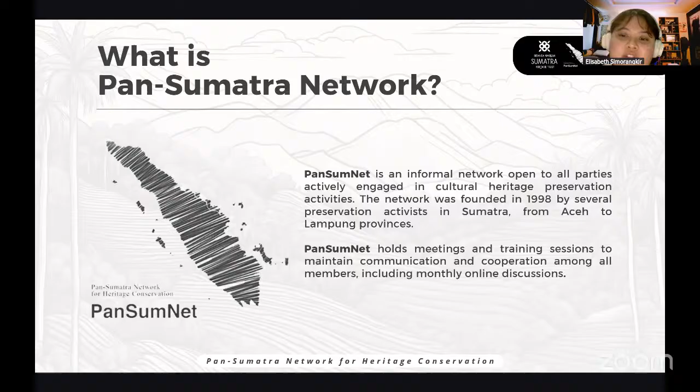and beyond. One of Pansumnet's regular activities is the Pansumnet monthly discussions, which has been held online since 2020. This program allows us to maintain communications, exchange knowledge, and build stronger connections among heritage practitioners, academics, professionals, and also communities.

Tonight's webinar is organized by Pan Sumatra Network for Heritage Conservation, the Sumatra Heritage Trust or Beranda Warisan Sumatra, and the Pusat Dokumentasi and Arsitektur or PDA. It is designed for heritage professionals, architects, and academics, and everyone who is passionate about preserving historical buildings and our cultural legacy.

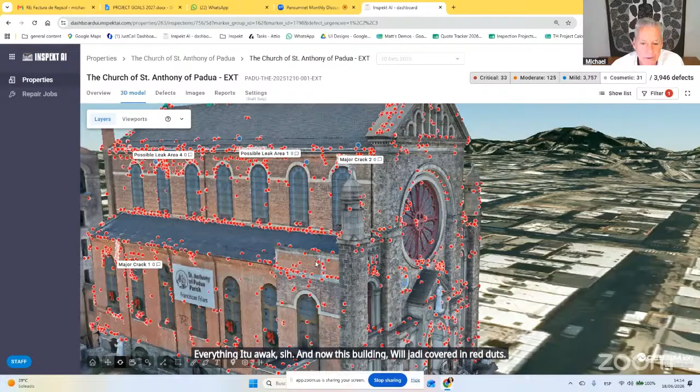But what we have is we've created this digital twin where you can see all the details on the building, and then we can turn off filters and look for critical, moderate, and mild defects. Now this building will be covered in red dots, and each dot is a defect located on the building. They tend to be cracks, mortar joints where the mortar has come out, broken glass, or something similar.

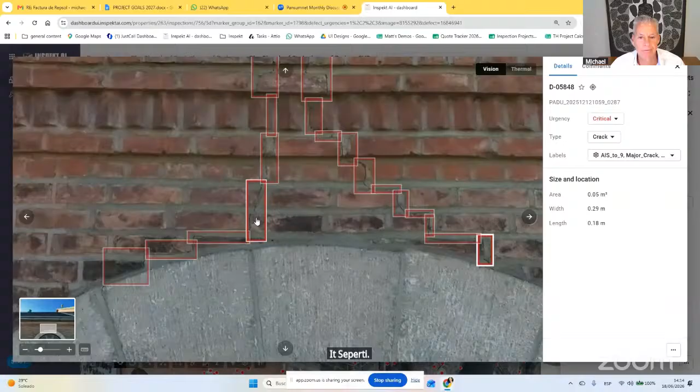So this building has many, many defects. If we go up here, we've got a major crack in this corner, running up this wall and coming back down the other side. This has actually snapped the wall in half, separating it from the roof, and this arch is settling. So everything is a little bit out of alignment, although you wouldn't see this from the street. This is quite a significant issue in this case.

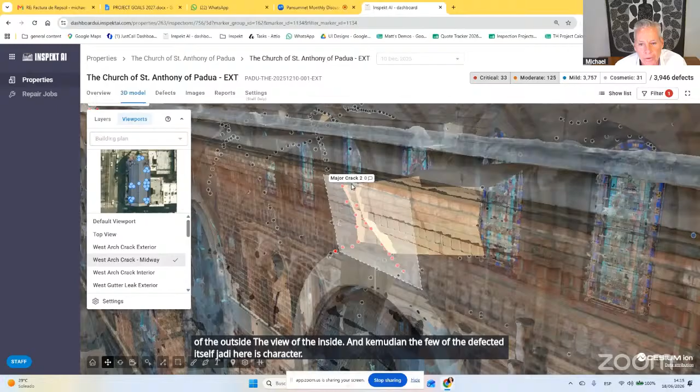And what we're able to do is look at the same view in X-ray vision. So you have the view of the outside, the view of the inside, and the view of the defect itself. Here's this crack going up the wall — in yellow, you have the crack as it moves through the wall, and here is the inside of that crack as it reaches the interior wall. We're able to take that data, find the same crack, and zoom back out to see all the damage caused by that specific flaw.

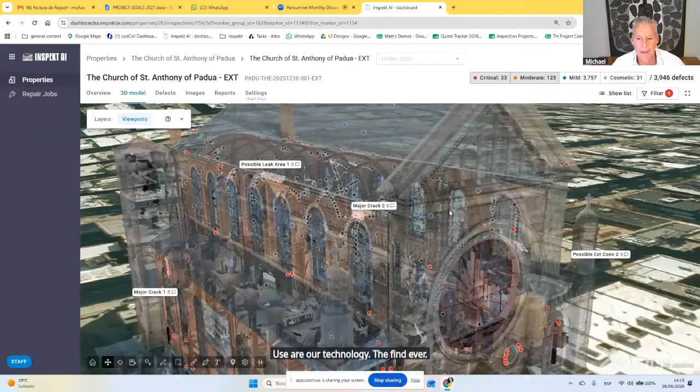Again, this isn't about the building type — you can do this on new buildings, old buildings, any type of building. So the first point is really just to take a structure and use our data and technology to find everything that's happening on it. At first glance, you can see all of this data.

And you can understand better what's critical. So we only have 33 critical things on the building and 125 moderate. The majority of this is quite mild, and you don't really need to do anything about it in the short term, but you have at least an understanding of what's happening at every point.

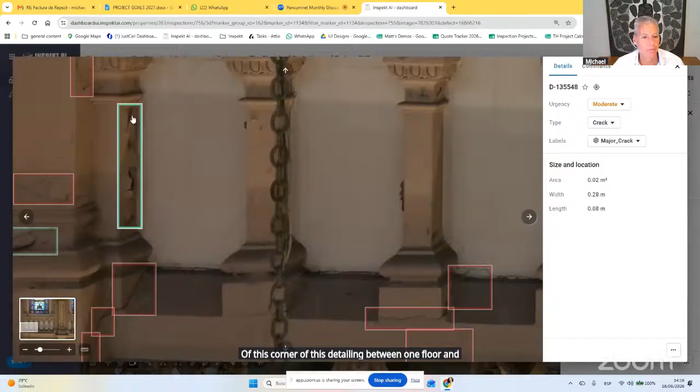You're able to go through the wall and arrive at the interior, look around, and also see defects here. As we move up the wall, you'll see there's cracking at the top. You can pick any location inside and see the same types of defects — in this case, cracks that have developed along this edge. If you know where they are, you can see this crack runs down along this edge and to the corner of the detailing between one floor and another. Further up, there's major cracking and damage on this column.

So we're able to identify everything from outside to inside on the building, and we're able to move back out and see the building from the outside. Then if you're looking for anything specific, you're able to filter immediately and see what you're looking for.

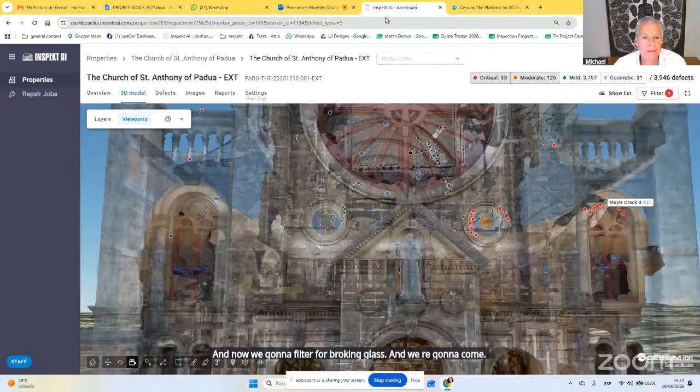So if we clear this and say we're looking for broken glass on this building, we click on broken glass, filter for it, and clear the moderate. Now we filter for broken glass and come up with a list of all broken glass — in this case, 1 critical, 1 moderate, and 22 mild pieces of glass. Here's all of your broken glass. You have a window that's broken and it has a measurement of the window. In this case, it's critical because it has shards of broken glass. Then you say, show me that location, and it'll instantly take you in the model to show you where that broken glass is located.

So in the old days, we would have to make a list somewhere of, oh, I think there's some broken glass.

We have 1 or 2 pieces here. In seconds, you're able to see every piece of broken glass on the whole building. You have measurements, and you can instantly send this to your glass contractor or whoever might be helping you, and get prices for getting all your glass fixed. So for one little piece of glass, we know the location, we know the size of the defect, and it can instantly be taken care of.

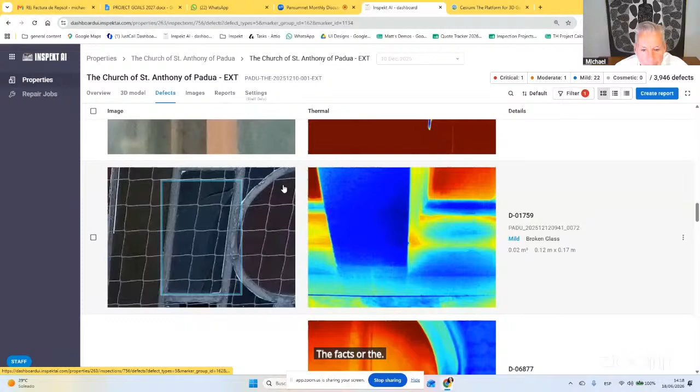So whether it's cracking or defects or things on the roof or major issues in cracking, I'll show you the Alhambra in a second, and there you obviously have a lot of major issues. The idea is to understand if you have 800 cracks on a building, you know you have 800 cracks, and when a new one appears, you know which one's new and which one's old. That's an enormously important way of understanding.

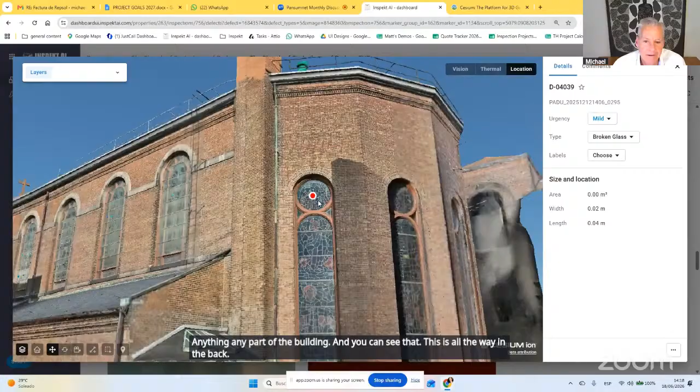Here we have something quite small, but it's a chip in this glass. Again, location makes it very easy to find any part of the building. You can see that this is all the way in the back at the very top, not something that would be easy to find using manual systems.

So when we take this project, on the outside of the building the system found 3,946 defects. Your first question might be, well, why do I need that number when I can't do anything about it? The most important thing our system does is take defects on a building and compare them from one year to the next.

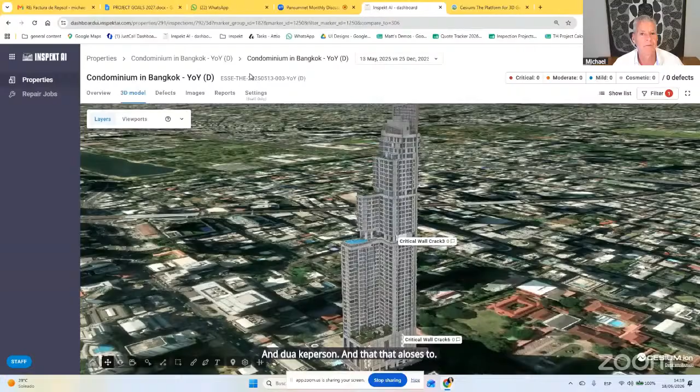Here you have a big tower, 23,000 defects, and we're able to take the comparison from one year to another and see what's happening with these issues as time goes on. The defects seem to be clear at the moment.

So let me show you a bit how a normal historic project works. I would first show you Sagrada Familia, the Gaudi, the great Gaudi church where the Pope was just last week, and they inaugurated it, becoming the world's tallest historic structure.

We've done so many different pieces of the building, but let me take you to the Passion facade, which in many ways is the most advanced part of this project. We go through and show you an existing section of facade here, with so much detail, so many cracks, so many flaws. In this facade, you've got 84,000 defects.

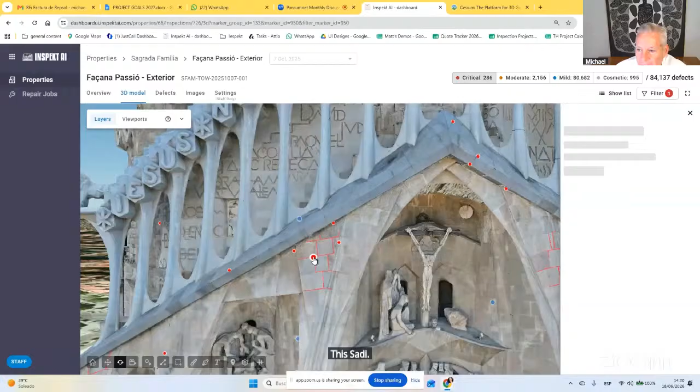If you knew how complicated this facade is. At the end of the day, you have these kinds of cracks running up and around sections in one piece, quite a network of cracking. Or we find hairline cracks between sections in the mortar joint, or something coming loose like this. All of this works together to give you an enormous amount of detail.

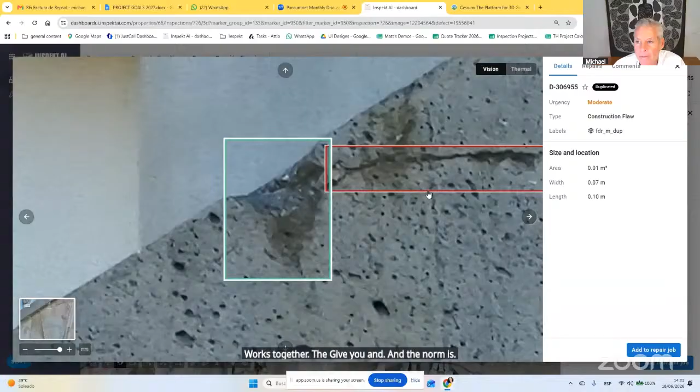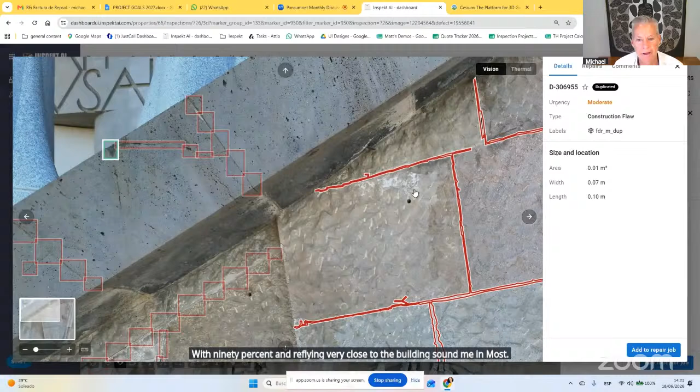So how do we do this? We use drones with 90% overlap, flying very close to the building, in most cases 3 to 5 meters. We're taking image after image, going in a pattern and capturing 90% overlap, which is a lot, so we're able to see a lot of detail on these kinds of things.

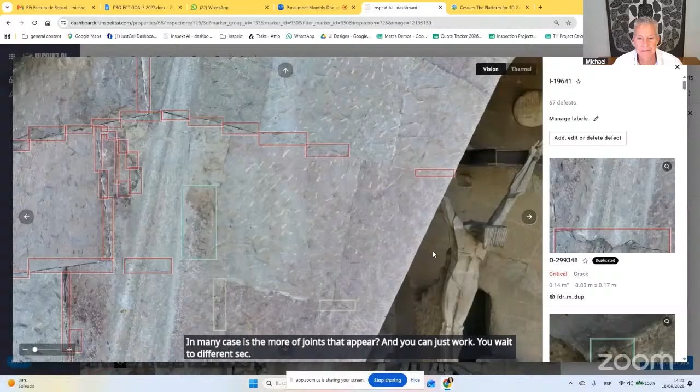In many cases the mortar joints appear, and you can work your way through different sections and see the detail of what the system finds, as well as the beauty of the architecture. The level of complexity includes old stone, new stone, and stone with areas where the mortar doesn't connect, which can crumble off over time. We also have very mild things like hairline cracks that the system will still pick up.

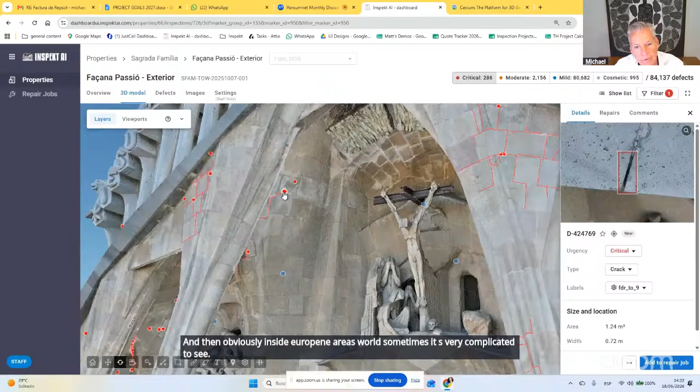Inside, there are areas where it's very complicated to see what's happening in corners, but because of the drone's abilities, we can fly in close and capture images in different areas. Here you have a piece of stone coming loose, which obviously needs to be resealed and taken care of. The drones themselves are not new technology, we use enterprise drones that are off the shelf.

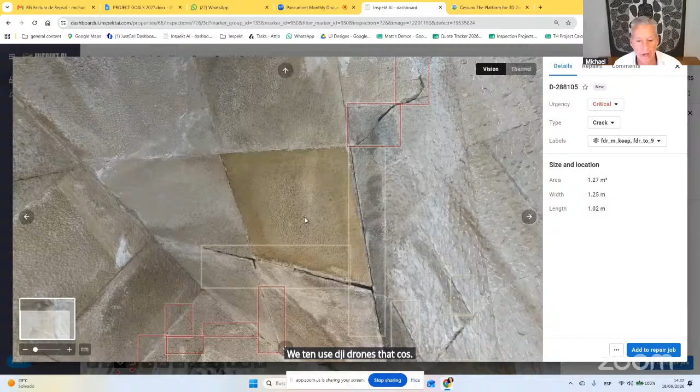We tend to use DJI drones that cost maybe $8,000, which take an 8K image and a thermal image at the same time. So all of our stuff has thermal imagery on it as well. In many cases, the detailing of the thermal image is quite important, and in other cases, like that image I just showed you, you don't really see anything at all.

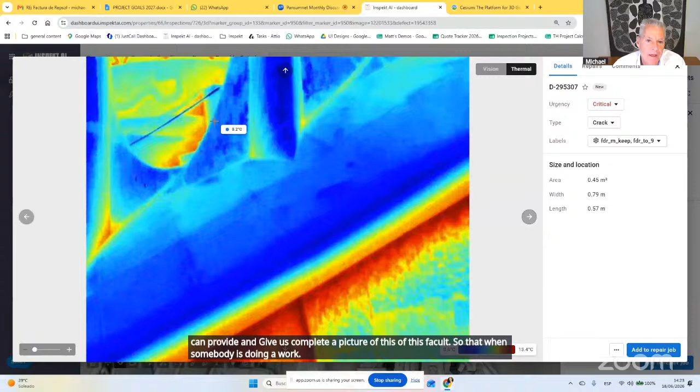But the idea is to combine all of the data points we can provide and give us a complete picture of this facade, so that when somebody's doing the work, they're able to understand what areas and sections of the building are most at risk of having something come off over time.

This is one of the two main facades of the building. They each have 4 towers in the front, and they're attached to the nave at the ends, providing a lot of natural beauty and a lot of messages from Gaudi on the interiors, which is always interesting to see.

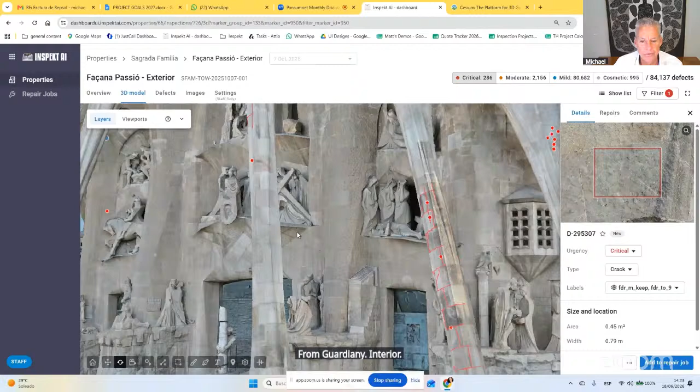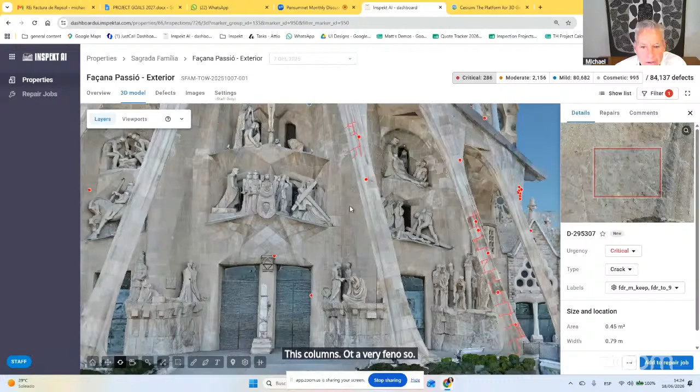Here you can see the complexity in some of these areas of these pieces. These columns that are very thin are also angled inward like a root, combining a tree form. In here, we're able to pick up small things that are difficult to identify, like loose materials, even in a piece that's not that high off the ground. But being able to understand all of this at scale is an enormous undertaking.

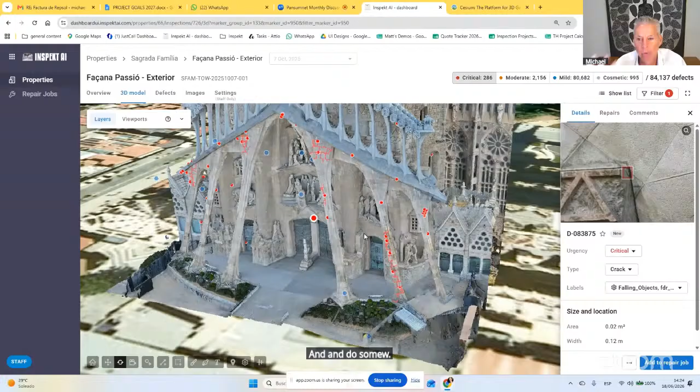When they were doing the work here, what they used to do was have people scaling off the building. They would take a picture of something, come back to the office, and the architect would say, 'that's something quite serious, let's go back and do some work on it.' And then they weren't able to find the defect again. So in many cases, it's easy to identify it the first time, but then being able to come back is the hard part.

You can imagine, as you go higher, it becomes harder to see. These tend to be areas where there's tiles and things coming loose, and we just want to make sure we identify any looseness before it becomes an issue. For us, one advantage is we get to see all this beautiful work that's really not available to the public, so this part is quite exciting.

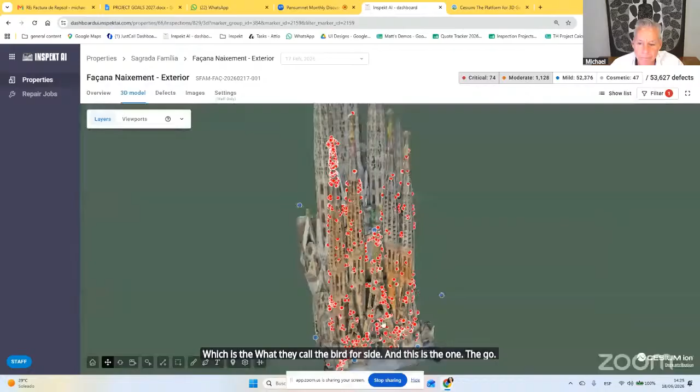On the other side, we have the original facade, which they call the birth facade. This is the one that Gaudi got to see completed while he was alive. So even though he designed everything, you can see this is much more manually designed, the sculpture everything is much more detailed, with more threadbare elements. Even though it's more sculptural instead of sleek angles, it has much more small-level detail. Still very hard to manage, but a different type of building altogether.

As you go through, you can see the incredible detail between these pieces and what comes behind them, and all the pieces that fit together to form this incredible mosaic of a building. What we're trying to do is help them identify what could be more serious, what are the issues that could hit them.

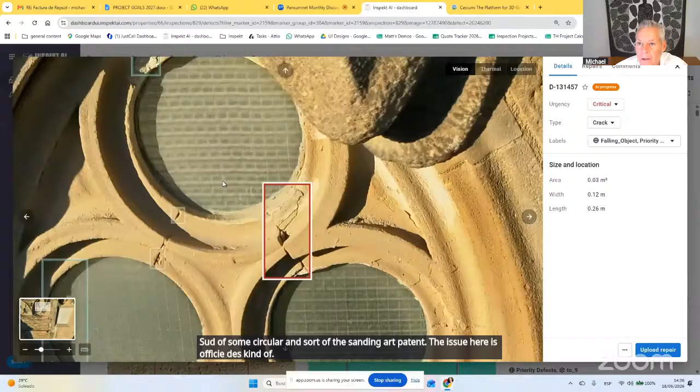Here you're able to see a significant issue on this window, even though it's designed in a semicircular, descending arch pattern. The issue here is obviously this kind of cracking that can be at risk. Then we can say, show us the location, and it'll send us out to the side of the building where you're able to see the location of this type of defect.

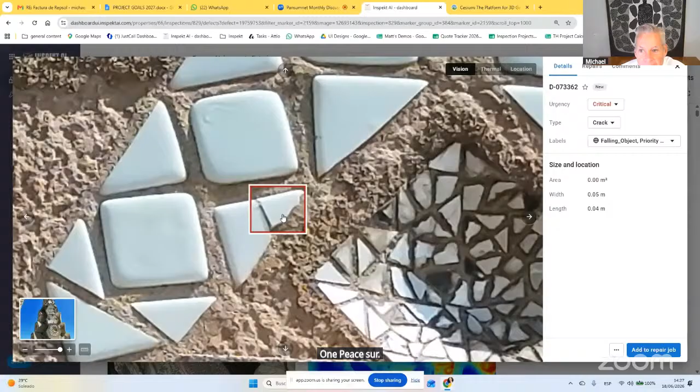In most of these cases, it's just about identifying, imagine identifying this one piece of tile that's clearly loose and about to fall off. Then you can say the location of this is going to be up near the top of the building. There's no way you're going to be able to do this manually.

Here we're going through another section of the building and coming back. This is not only up top, but also on the back side of the building. So here you can see where that tile is located, no problem finding it anymore, and you're able to identify that that's something significant that needs to be taken care of.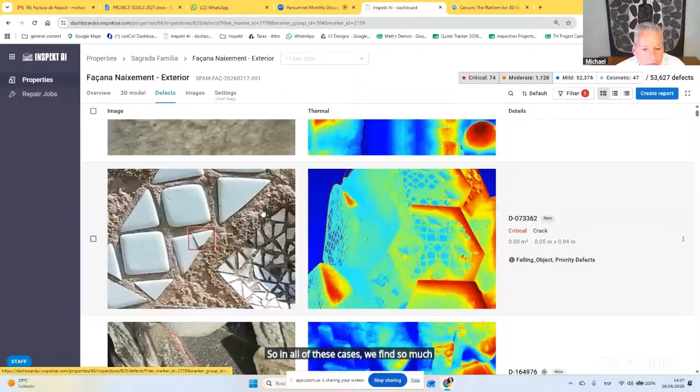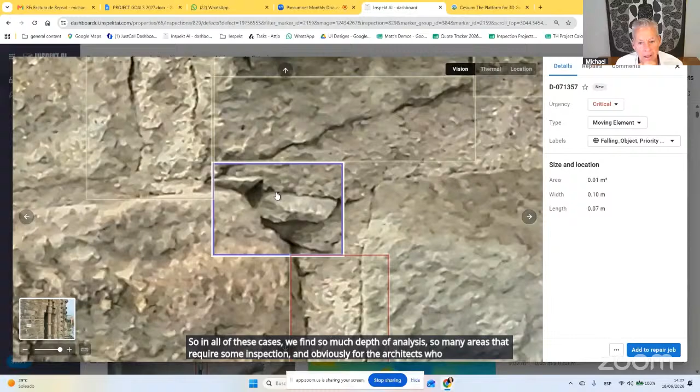So in all of these cases, we find so much depth of analysis, so many areas that require inspection. For the architects who use this every day, they take a defect like this one, for example. The architect will make a quick sketch, send his scaler up there to make a fix.

We have a QR code. The guy then takes a scan of the defect, then takes an image. So when you open up this defect, you see the defect and you're able to see the fix. The architect would just add this to the repair job, and instantly it creates a QR code for that defect.

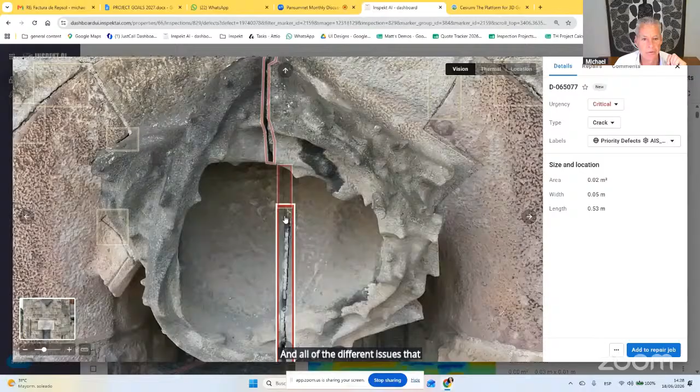And then room to create a historical record. A video can go in there, images, and you can have a silo of this one defect for the coming years - the name of the material, the type used, all the issues that need to be addressed, the sketch from the architect, and everything involved to make the repair and track it over time.

So two years later, we might have a defect that was fixed and is failing again, and another one that was fixed and isn't failing, so we know what type of repairs are working better than others. That obviously has a lot of value as well.

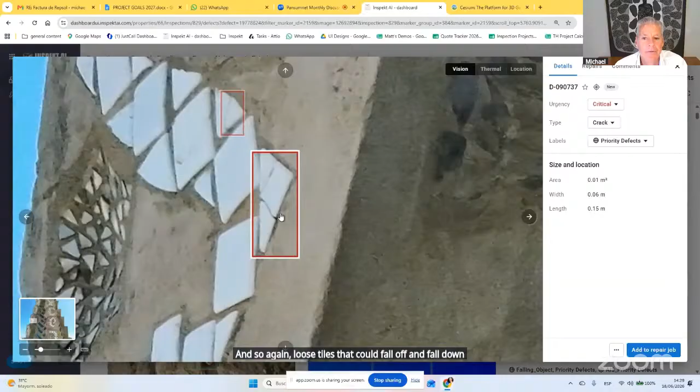Again, loose tiles that could fall off and fall down 150 meters to the ground is not what you want to have happen. In this case, again, up very high in the building, you're able to get that piece removed. It's exciting work from our part to work on something like this.

We also have another one of Gaudi's buildings - if you've been to Barcelona, it's a smaller 5-story apartment building originally, but again a very beautiful building with a lot of metal railings made out of sheet panels, and there are defects. A lot of this stonework was carved by hand, and anywhere along the edges here, you'd be able to see the critical defects because there's all kinds of material coming loose.

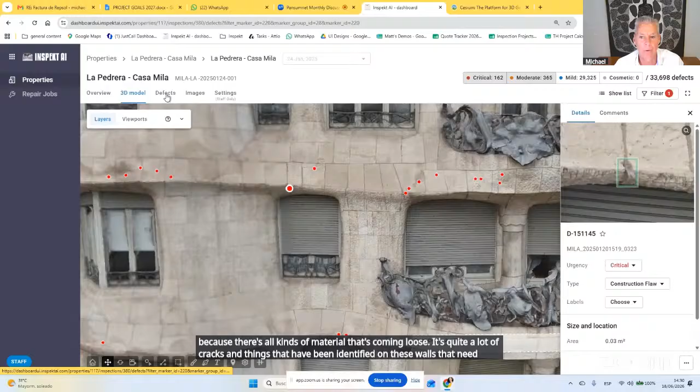It's quite a lot of cracks and things identified on these walls that need to be repaired quite quickly. So we have a lot of cracking. This being a good example, you can see there's a crack in this stone running along this edge here, and this needs to be sealed to keep it from falling.

And they have had some issues on items that have fallen and things like that. Obviously not what you want to have happen. But again, this is a beautiful building.

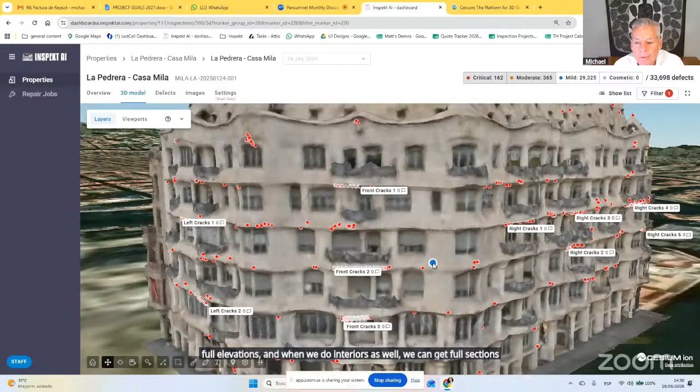We're able to pull plans off of this. So the architect working on this building gets this from our work at no additional cost. We can get full elevations, and when we do interiors as well, we can get full sections of the building instead of having them be hand drawn.

Let's say that you were doing a historic project somewhere in your region. You would be able to have a drone pilot from our team come out and scan your building, send it up. We would then do the defect work in the cloud, and at the end of the day, you would also have plans.

If we go to details here, you have all the drawings of the elevations of Casa Mila, which is obviously not an easy project to do manually, right? It's almost, in many cases, impossible to draw by hand. So this type of project, again, is something that we're excited to work on. We have other Gaudi buildings we've already done, but these are the two main ones we've worked on.

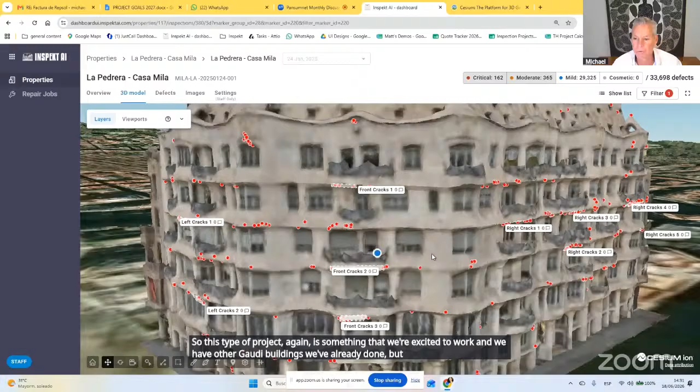Another project we're really, really proud of is the Alhambra. This is a project we're starting to do, working our way through the building, doing parts and pieces at a time of this incredibly complex level of work.

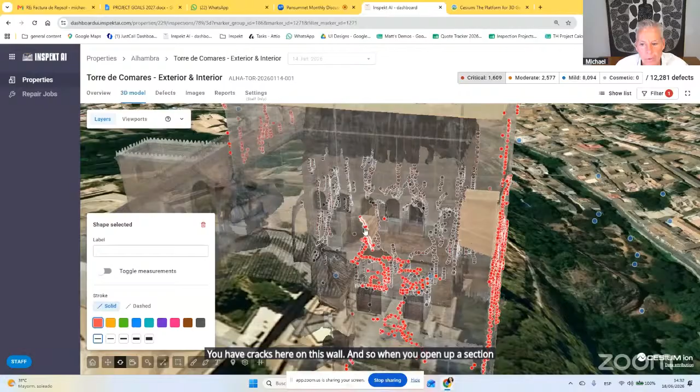When you open up a section of crack and want to see a defect, you can look at this crack from the outside and see that sadly 100 years ago, they started using cement to fix these walls, which they should have never done. But you have old cracks - all the cracks existing on this building are identified.

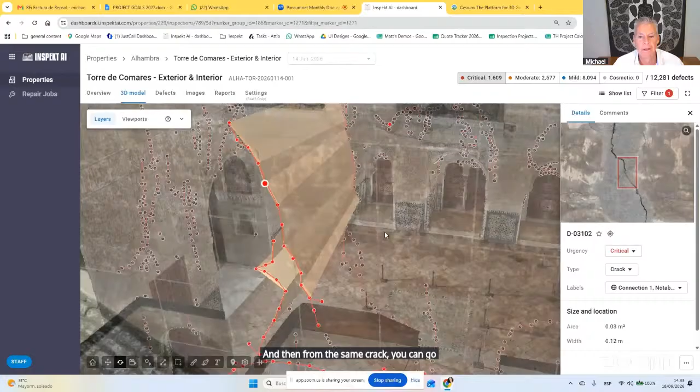So if next year there was a new crack that formed here, we would be able to tell the difference between the older ones and the new ones. And then from the same crack, you can go through the wall and end up inside and rotate yourself around.

So you're able to see the networks of defects on these walls, but also just the great beauty of the space. In these cases, we're able to click on a defect and see the level of complexity of our analysis within the overall whole. Let me just open one up here, and you can see cracks in a very technical space. This is incredibly hard for an AI system or any visual system to find, but we're able to identify all of these defects in this incredible mosaic.

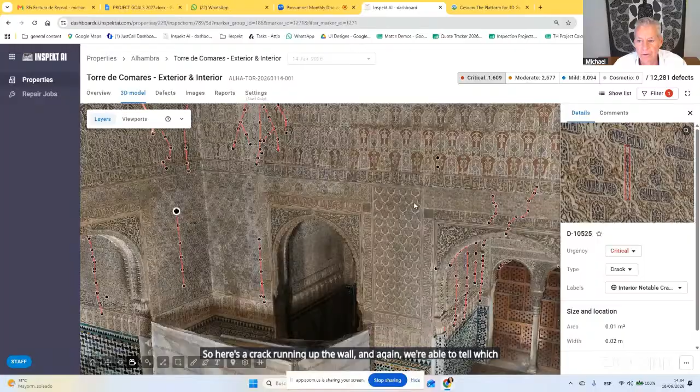So here's a crack running up the wall, and again, we're able to tell which ones are only interior surface cracks, and which ones are cracks that run through to the outside. In this case, we have a crack that starts on the inside and does run to the outer wall, and we can track this through from inside to outside.

The level of complexity in all of this work is very hard. Doing it using AI and then having the overlap of different images, being able to see these things from different angles, really adds a lot to the technology, and makes us very proud that in this case we can get something to this level of complexity.

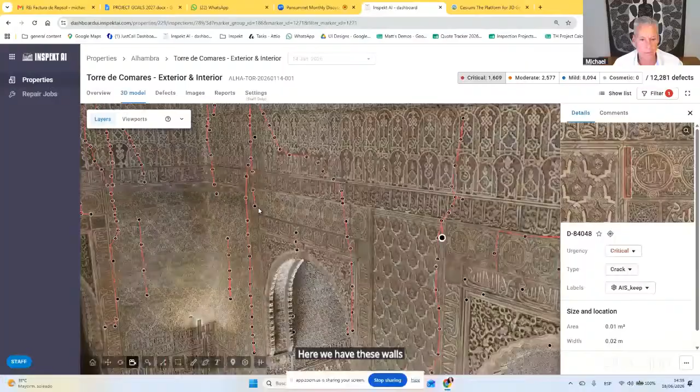Now here we have these walls. This was like, again, where the Sultan would sit in this space, so no one could see his face, only the back. They could see him in silhouette. And he would sit in these arches here with the light streaming through. This inspection was done at night.

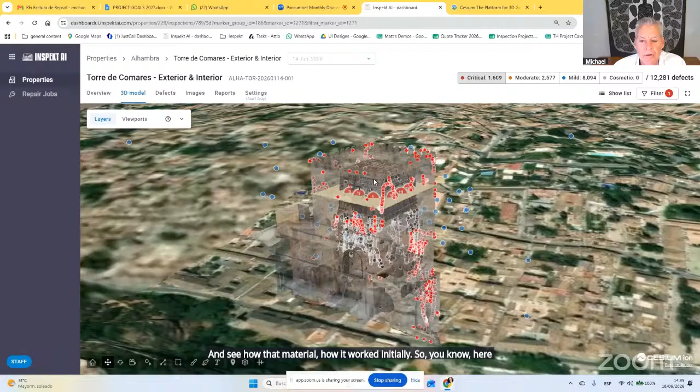And then you have this beautiful roof that's inlaid with all this material of different things. And for us, we're able to go through the roof and pass onto the area above, and get into above the ceiling and see how that material worked initially. So here we have this structure above the roof, which has been scaffolded up, and we have areas where we're making sure that nothing moves.

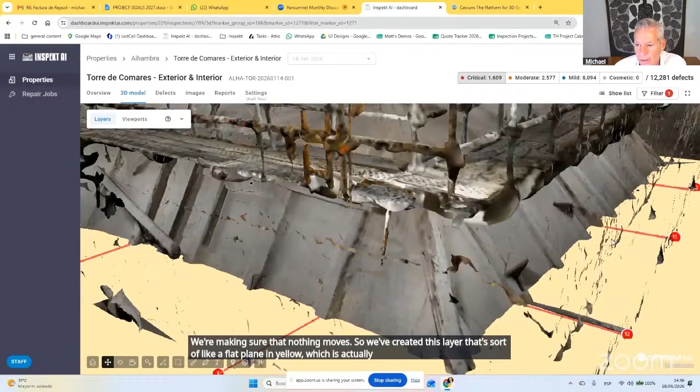So we've created this layer that's sort of like a flat plane in yellow, which is actually not a floor, it's just a plane we've created so we can have mark points. If this roof moves, if the ceiling moves even a centimeter, a millimeter downward, we would be able to tell that difference. In this space, it allows us to really get down into seeing the inside of this old walls are in one type of material. And then as we move through into the space below, you're looking at a different type of material. So all of this allows us to look down between the layers of a building like this and see the great complexity of it.

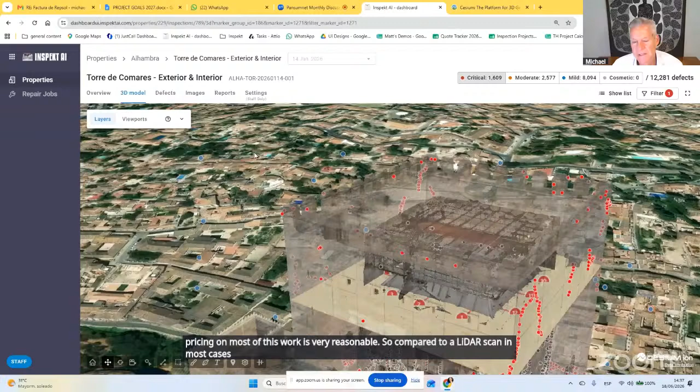So again, this is something for us that's really, really cool. And again, the pricing on most of this work is very reasonable. Compared to a LiDAR scan, in most cases we are about the same price, but the advantage in our case is that we find the defects, and we're able to compare them over time. This means that on any kind of historic building, the value is very high.

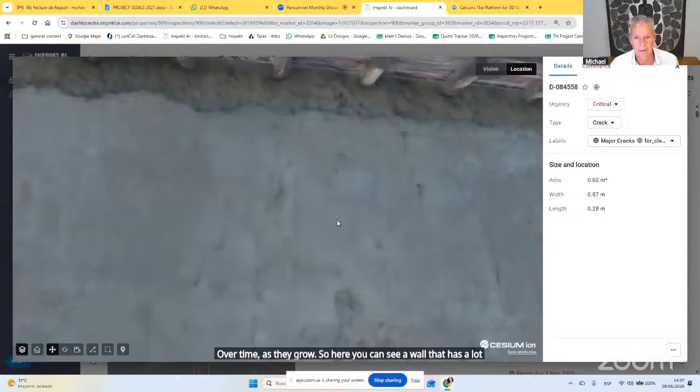So here you can see a wall that has a lot of different cracks on it, but what they want to understand is which cracks are old, which ones are new, and can we catalog all this information. On this kind of project, it's fundamental to understand everything that's happening, see what areas of the cornices and all of that are in good shape and which ones are in bad shape, and identify all these materials. Our system works on any type of material, whether it's plaster, stone, wood, adobe, like you saw on the Alhambra, and any other kind of material we can find defects on.

So we find missing screws, we find rot in wood, so we can find termite defects, things that are quite mild. Going back to the Alhambra, there was a section in the interior of one where the system did pick up termite damage underneath, at the roof line, and so that's something that we are also able to identify quite up close, and important elements to be able to help with.

As I spin this around, we're able to see areas in these incredibly complicated zones where some of this material is in bad shape, that over time you can see damage that's happening in wood, parts that are wood, damage in materials, and also just general deterioration. In these kinds of images, you can see levels of complexity that are quite extreme and really give us an ability to see things up close and provide an incredible amount of detail.

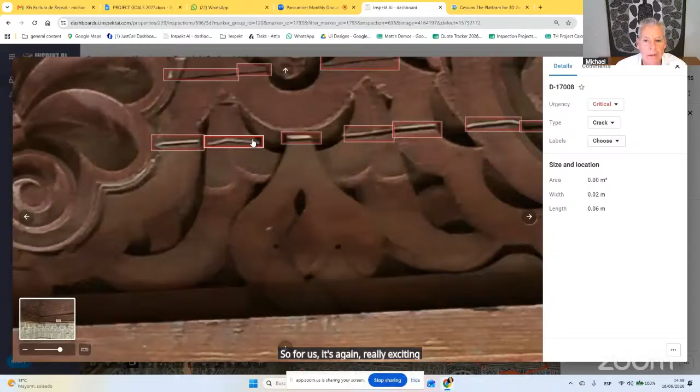So for us, it's really exciting work, crack in wood here, and it'll all be picked up one way or another. Another space where you have some significant cracks. Here's one, this is the standard pattern over an arch, we get this arch pattern and then a crack that runs up the wall. We're able to pick up all this information and identify on a larger wall where all of this is running.

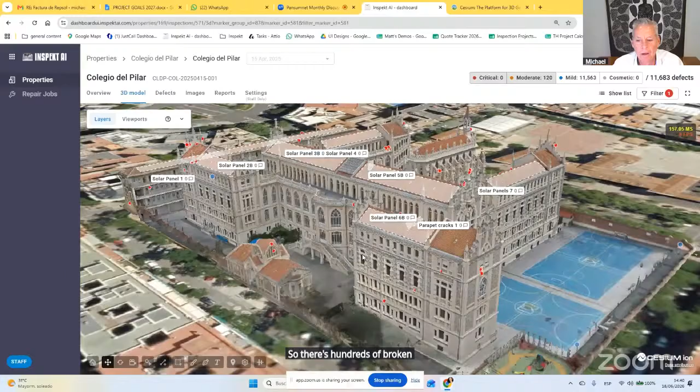Finally, as I wrap up, and I'd love to take some questions, we work at a variety of different scales. This is an old historic Gothic style school in Spain, and it's a complicated building. There's hundreds of broken glass on this. We have areas where they're trying to just protect the school and the building. In many cases, what they're trying to do is identify areas where there might be something loose that could fall off and do damage to the children that go to the school.

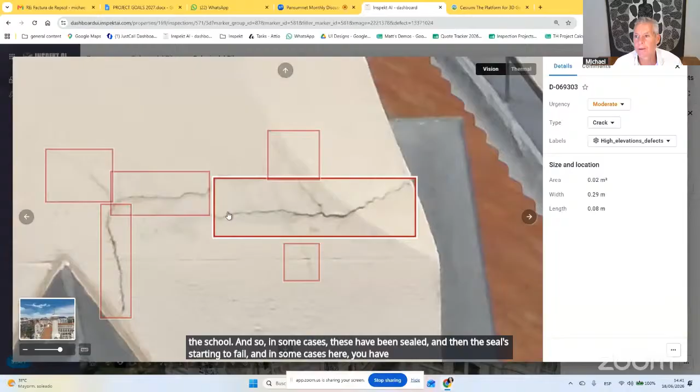In some cases, these have been sealed, and then the seal's starting to fail, and in some cases here you have new levels of cracking. All of this kind of work that we're able to identify over time is really just here so that someone can manage a building more efficiently. With limited resources, they can take something like this, and with some quick sealing it can be in good shape for a long time. But if ignored, at some point that piece will fall off, and we're trying to preserve history as best we can.

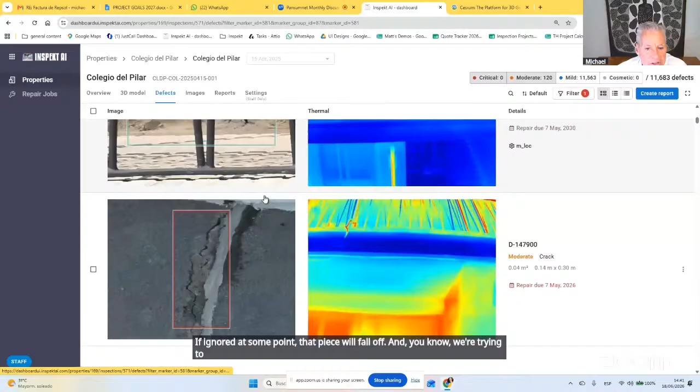Obviously we always have, in many cases, limited budgets, so budgets are always an issue. But if we have an enormous building and we don't know where to begin, the cost is going to be much higher just to guess, or even worse, to just ignore everything.

So when we're able to catalog what we're dealing with, like in this area, there was some serious damage to these railings. You can see all in this one area there's these kinds of cracks. They're able to get in here, and this was probably the most serious thing we found, so they built a scaffold and did some work in this area and fixed it. Whereas in other areas, they could at least monitor what they're dealing with from time to time.

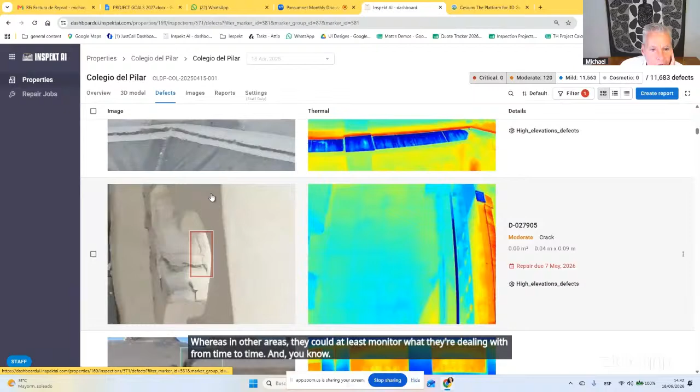Any building in the world, or any kind of monument or structure or temple or any kind of building that can be in some way at least cataloged, identified, and then protected is an important place to start. And that's what we're here to offer, and we would love to show you further in specific details on any kind of building.

The way our process normally works - I just did a historic church in Eastern England, in Exning, and they contacted me 2 days ago and said we have a building and some parts of a cornice fell off, and we need to do an inspection to see how bad the result is. So we are sending a drone pilot there with a flight plan. We collect all the data, and then we deliver plans, sections, and elevations, so now they'll have a full record of what's happening. On that information will also be applied the defects, so they can turn this into their historical society and be able to see what the resulting issues are and what the fixes are, so everybody can deal with it all at once.

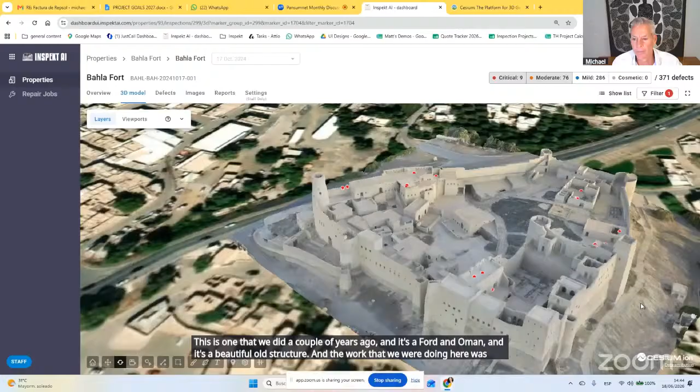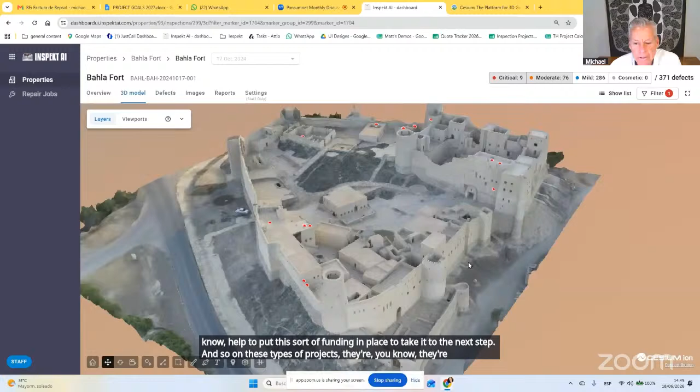The work we were doing here was really to help the community. As UNESCO has identified, one issue is that if someone writes an 8-page report saying there are lots of defects on a building and it needs help, it's hard to get funding for a vague report. When we put something together that shows individual defects and the total numbers of cracks and everything happening throughout, with measured drawings and all the information, we have a much better chance of understanding what's defining this project and putting funding in place for the next step. These projects are very beautiful, and we're trying to be helpful in protecting them. At the first level, it's about understanding the scope, the materials, and where these buildings are failing over time so they can be protected.

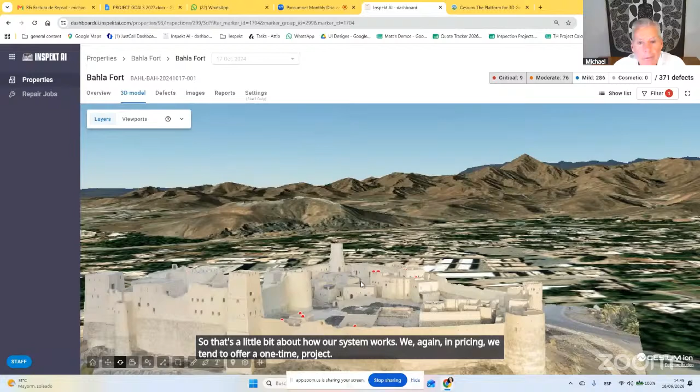So that's a little bit about how our system works. In pricing, we tend to offer a one-time project. I'm an architect, so it's important to me that you can take a project, and I'd say the cost is $5,000 to do everything involved in scoping and inspecting a project. We don't have subscription fees, storage fees, or any annual add-on prices. Ten years from now, if the people handling these projects want to come back and see how their buildings looked in 2024, it's here waiting for them.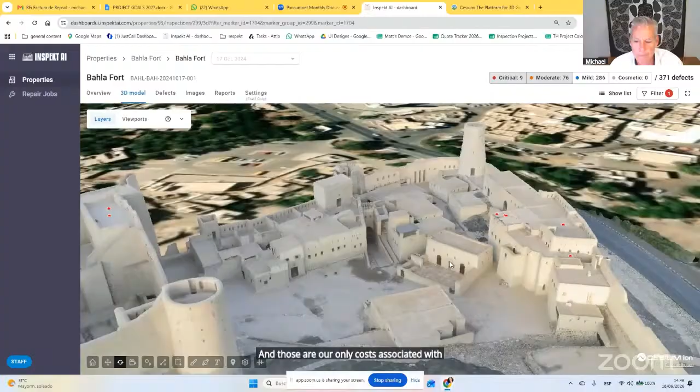So I'll stop in a moment and open this up to questions. We do buildings of every type around the world, so someone might ask if we only work in some part of the world. The answer is no — we currently work in 18 countries.

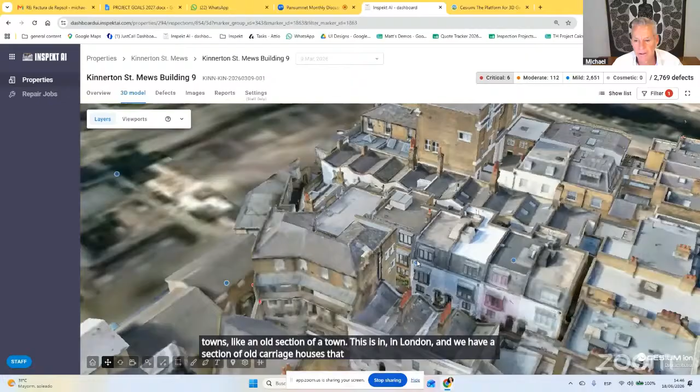We do older buildings, newer buildings, and sections of towns, like an old section of a town. This is in London, where we have a section of old carriage houses inspected by us for this whole section of town. The idea is we're able to identify issues on one building, like cracking or any kind of defect, so they can be properly assessed and repaired. Secondarily, you have a digital twin of this section of the neighborhood, and we're able to use that information for thermal energy assessments, identifying where the energy inefficiency is. In many cases these buildings are poorly insulated, and we can identify all of this for our clients, municipal governments, and anyone needing services to help protect their communities and our history.

So that's a little bit about how this works, and I'd love to take some questions if you have them. I'll stop sharing, but I can open this back up again.

Thank you so much. Okay, thank you, Michael. Very, very good presentation. From Michael's presentation and from Inspekt AI, we can learn a lot of things. We can see how Inspekt AI worked on the Bahla Fort in Oman, Collegiate School, and also the Alhambra Monastery, and the very beautiful Gaudi Church, right?

From the presentation, we learn how Inspekt AI maximizes the use of drones, and also photogrammetry, digital twin, and putting it on the web to inform future work. I want to highlight that even using drones, we can have the architect identify and detect any further defect or any kind of material defect on the buildings. So it's very interesting, and I see there are some questions for you, Michael.

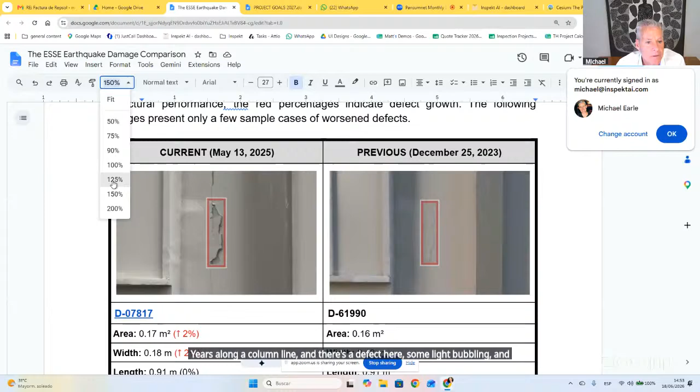I was just going to show you, we have a project here in Thailand that went through a very mild earthquake by most people's accounting, but it's still earthquake damage. You can see here's along a column line, and there's a defect here, some light bubbling. As you get closer, the defect has grown significantly, so that's the size change. Here we have a mild crack that's turned into something serious. Here we have a crack that's growing quite a lot and expanding out. Here we have some hairline cracking that has doubled. In this case, it doesn't look like it's changed all that much, but you can see from one inspection to the other, here you have hairline cracking along a column line that has gotten quite a bit worse, for example.

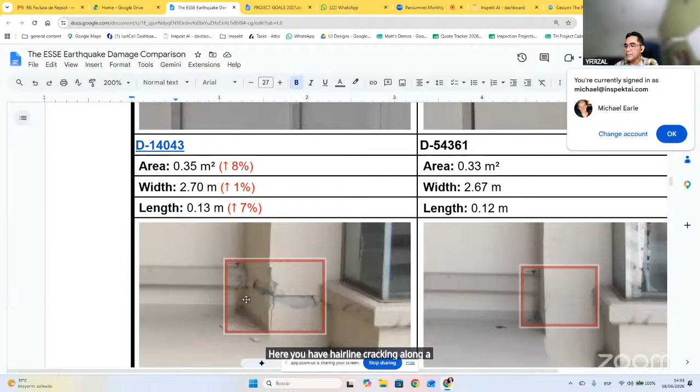Another question: is it applicable for the more landscape side, not just buildings, such as the ruins of a village, something like that? It's applicable for basically any material, but I didn't quite understand the question. Sorry, the question is if the technology can be used for the more landscape type, not a building or high tower, for example.

So yeah, I just got asked about a project where they're doing some high value crops that have damage on them, and would our system be able to find that kind of damage, in other words diseased plants as opposed to non-diseased. Our system will pick that up. I'm an architect, and our market is really every building in the world, but we're doing wind turbines, dams in Spain, bridges in different parts of the world, so there's really no limit to what we are able to do. In Panama, there was a big fire underneath a bridge in the main crossing for the Bridge of the Americas, and there was an enormous fireball that came up. We're currently doing an inspection on that to identify the condition of all the steel beams underneath this bridge.

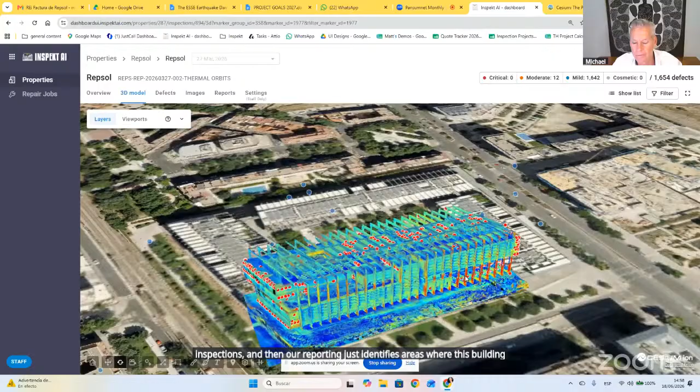That tends to be a specific service. For example, if I show you this modern project, we have thermal inspections, and our reporting identifies areas where this building is leaking, specific areas where the defects are particularly bad. When we look at these defects, we're able to use the thermography to identify zones - you can see on this frame there's significant leaking happening here and here. This joint is completely giving way, so heat is escaping, same here, heat escaping through the glass, and all of these zones are identified by one characteristic or another.

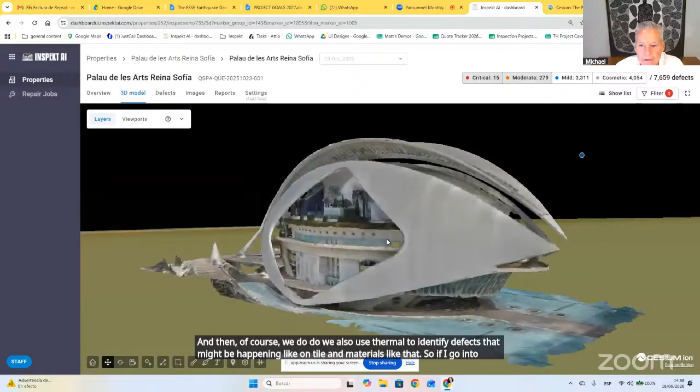We also use thermal imaging to identify defects that might be happening on tile and similar materials. This is a modern building, a Calatrava building in Valencia that we've inspected. When we open up this defect here, you'll see tiling that from a distance is very hard to see, but when you go to the thermal imagery, you can see very clearly that the defect is loose tiles. Then when we go back to the visual and get in really close, you can see where the cracking moves along.

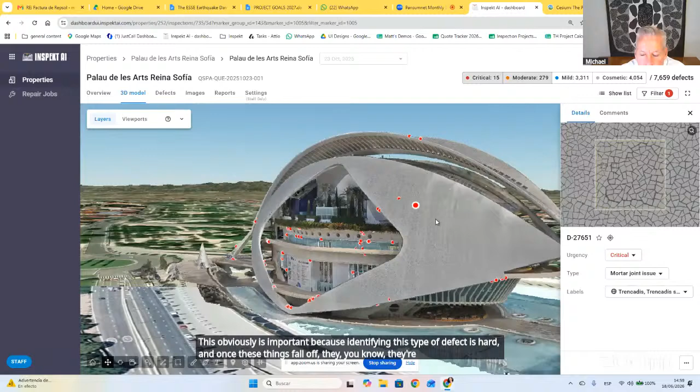This is obviously important because identifying this type of defect is hard, and once these things fall off, they're very dangerous. Before we started working on this building, a scaler fell off and died, unfortunately, and they decided to switch from manual inspections with scaling to something more advanced that can be protected. So that's a little bit about how our technology works.

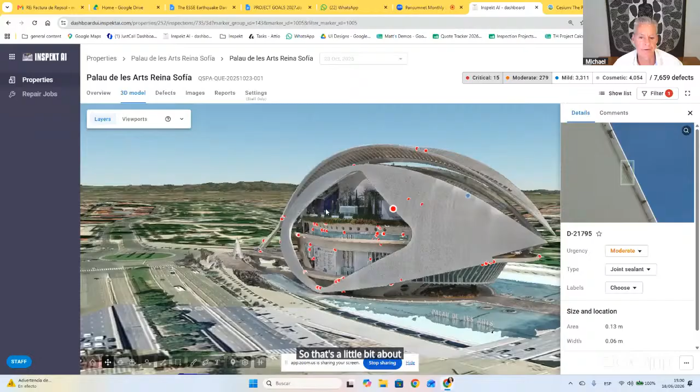Next question - okay, so you work mostly on buildings, right? The building, almost a kind of building. The next question from Ochi: can this technology be used to detect defects for a very wide, large area?

For example, a corridor stretching 6 kilometers or something like that - is it possible to use this technology to look for defects or any work over a very large area?

Yes, we can get something from a further distance and not quite as close. There are always ways of doing this, as long as we have the data, we can always crunch it and break it down.

We've worked on buildings with enormous roofs where we found thousands of little missing rivets on a metal roof and things like that. So at scale, we can do any kind of building, and large plants like these are also part of our work.

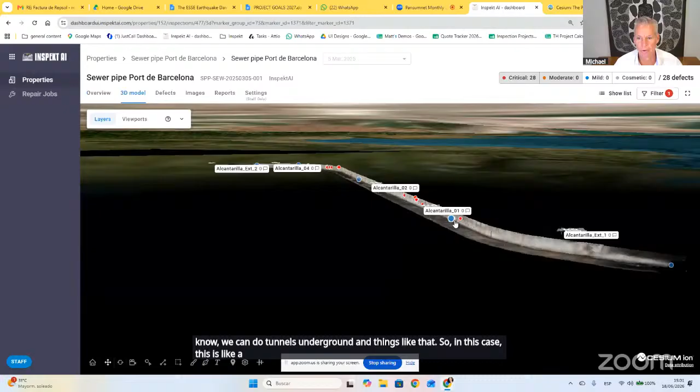We can also do tunnels underground. In this case, this is a tunnel under a port in Barcelona, and they didn't even know where it went. We were able to follow the tunnel along and identify all the major defects, including where rebar is coming through.

This is relevant because we have old historic tunnels in older buildings—castles tend to have escape tunnels—so we can identify those in many cases. In this case they literally didn't know where the tunnel was; they had an entrance and an exit, but we identified the exact location on the plan.

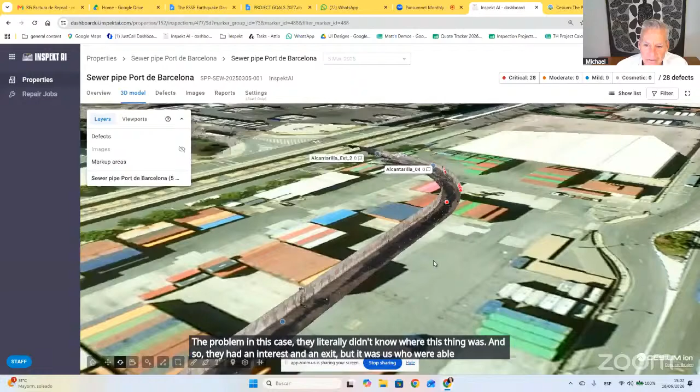They're putting up a new building and didn't know exactly where this tunnel sat, so it's a challenging project to identify. Here we have the start, here the finish, and in between an area full of shipping containers—so a real challenge, very, very challenging.

I think this last question from the blogs is about a technical thing: do you have any limitations for this technology? How far are the limits, the boundaries of this technology?

The limitations are based around the quality of the data. As camera technology gets better, we'll be able to improve in that way.

The long-term vision is to have a global understanding of this: this type of material has this type of repair that doesn't work, and this type that does work. A 100-year-old stone from this quarry is holding up like this, or the cracks are expanding over time. We'll have this incredible library of data to help historians identify every type of material in much more depth.

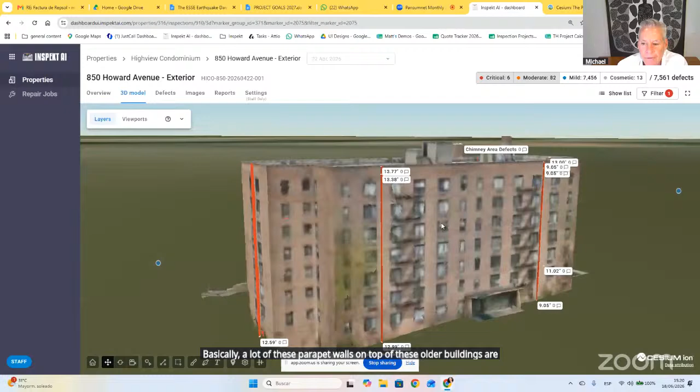So this is just a standard building. What we do is these reds are basically plumb bob, and they will tell you - we have 1290 on one, the height of the building - it'll get right down to the millimeter and tell you how close you are. This is the edge of the roof, here's a parapet wall, and we can say this parapet wall is leaning in by half an inch, and the next one along is actually perfectly flush. This is the level of detail we can get to.

Imagine you were doing an old tower or wall on a fort or castle or some infrastructure - we're able to tell you if the wall is leaning outwards now, and will it be leaning in the future. So that's the advantage of being able to see the comparison between today and some future time.

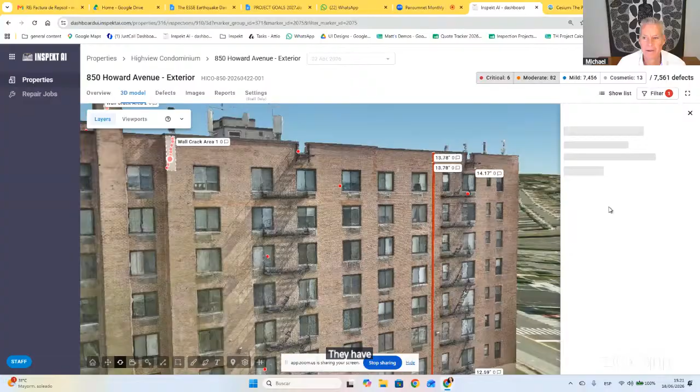Here you have a perfectly flat parapet wall, so we can report to the city of New York that the parapets are not failing. They have cracks on their walls, some quite bad, which you could never see from the ground, but you can see a crack moving up through the space and running along these walls. But again, you have to start somewhere. So yeah, any kind of material and anything you want to identify and do a comparison on, we can help.

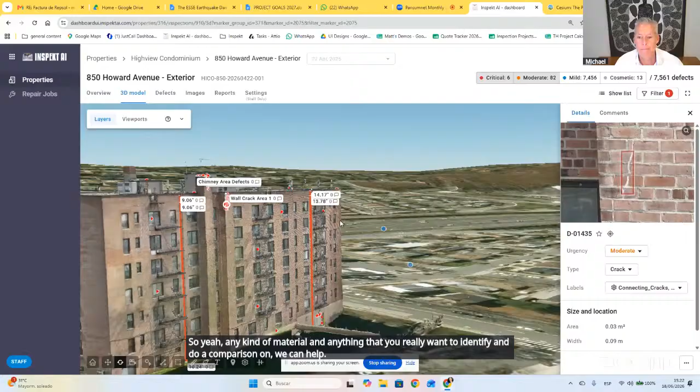Yeah, so it's definitely not better. Like I was saying, on the Alhambra they did LiDAR first, and then they figured out LiDAR will give you the form of the building, but it won't give you enough detail so you can actually see the defects. Without the defects, what you have is an outline - well, you have a point cloud, but you don't have the defects themselves.

And so now they're going back, and in the Alhambra's view, the difference between what we do and what LiDAR alone can capture is very, very dramatic. The point is to give them the ability to see all the defects and compare them over time.

That's based on my own project. I'm using LiDAR, drone, and drone LiDAR as well. Every tool, every device has its own advantages and disadvantages.

Okay, any question from the audience for anyone? It's almost 80 minutes now. Any question? Another question, Michael: which work was the most difficult, or the most interesting, or the most remarkable of your work?